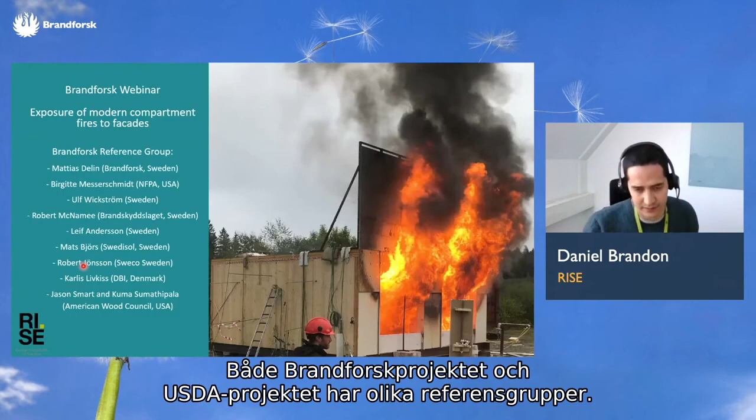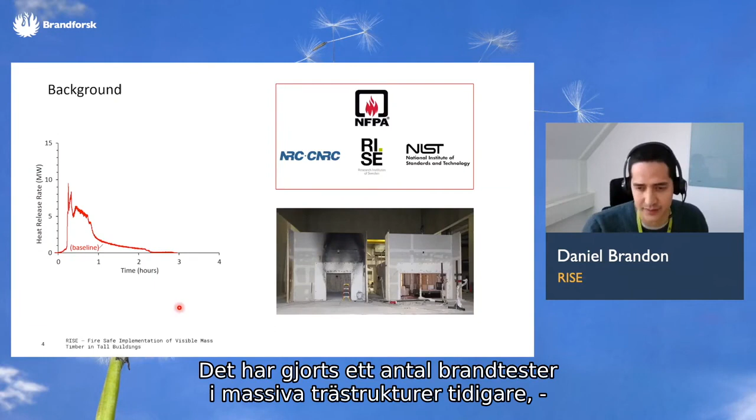A number of compartment fire tests of mass timber structures has been performed before. However, because of recent developments of materials, but also recent new regulations, new tests are needed. In order to explain what these new developments are, I use an older study as reference, which was led by the NFPA, performed by NRC Canada, NIST, and RISE.

This research project had 6 compartment fire tests of 2 configurations shown here. Now I just discussed the ones on the left. You see for this configuration a heat release rate curve of the baseline test, which was a test where all surfaces were protected with gypsum board.

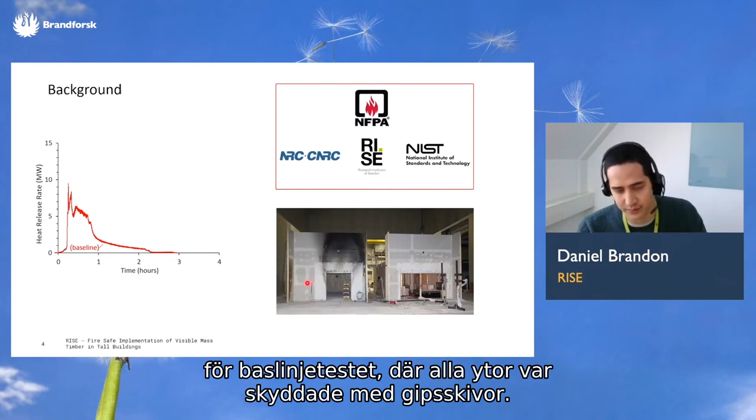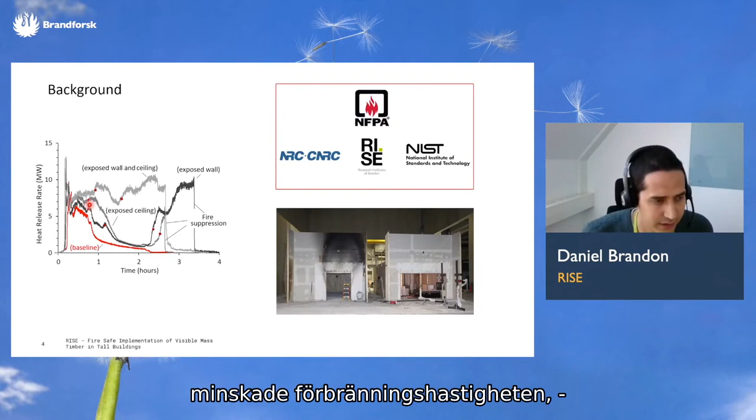I now add the results of the other test where some CLT was exposed, and you see that in contrast with the baseline test where we have a steady decay, there are locations and times in which the heat release rate increased, and we know that the movable content on the floor reduced in combustion rates. That does indicate that the combustion rate of the structure increased at these locations, and it was clear that fire-induced delamination was the cause of this.

During fire-induced delamination, also called glue line integrity failure in Europe, the exposed lamella falls off due to weakening of the bond line, exposing a new colder surface to the fire. If the fire temperatures are hot enough, this surface heats up rapidly, chars rapidly, and combusts rapidly. If we manage to avoid this delamination, we could expect these points to change, and the fire dynamics in the room will change significantly.

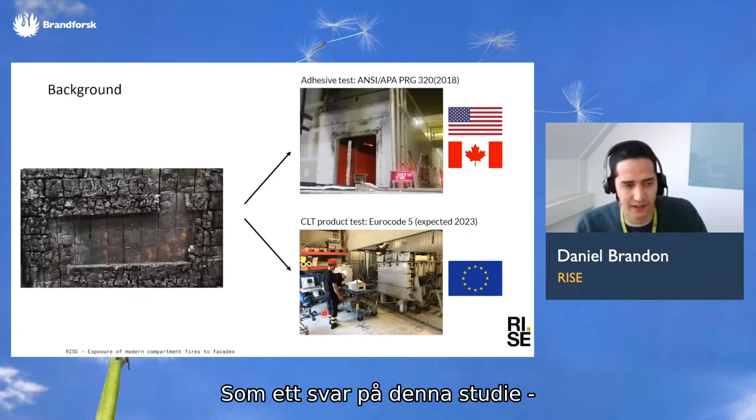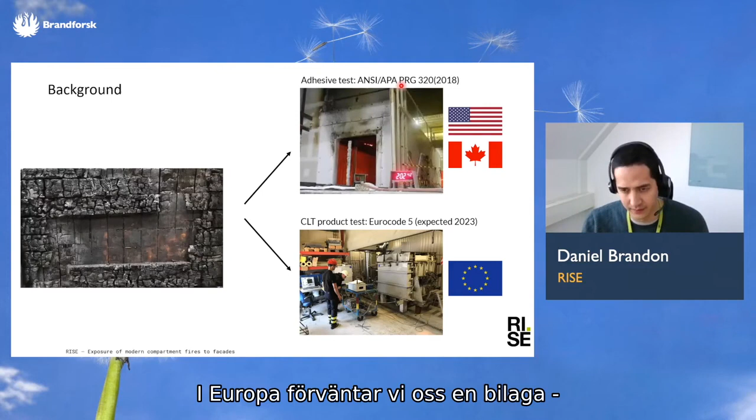As a response to this study, and also some other studies that showed the same effect, there was a new regulation included in the PRG 320, the product standard for CLT in the US and Canada. In Europe, we expect an annex with a standard test method in the next Eurocode 5. Both aim to avoid this delamination and subsequently affect the fire performance of CLT in compartment fires in a positive way.

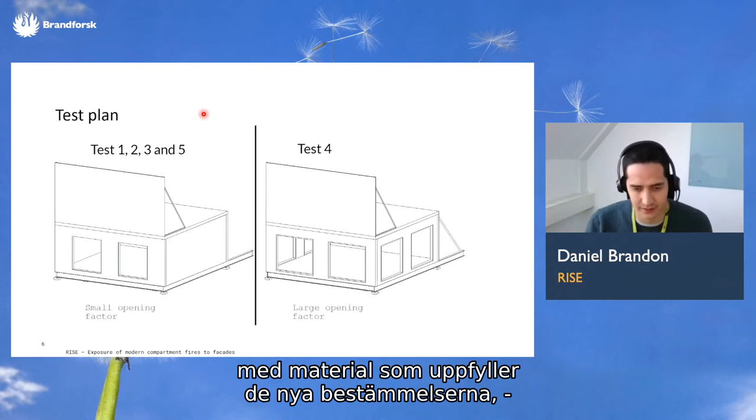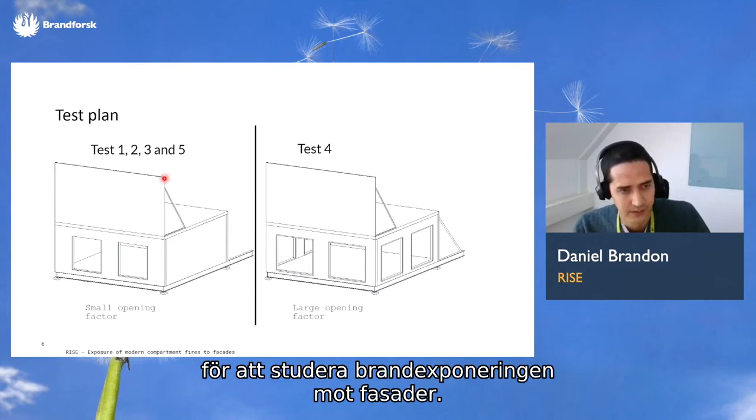So now with the new regulations, we actually need tests conducted with materials that comply with these new regulations, and that's why we did these tests. We performed 5 compartment tests, 4 with a relatively small opening and 1 with larger openings. We added a facade extension on all compartment tests to study the exposure of these fires on facades.

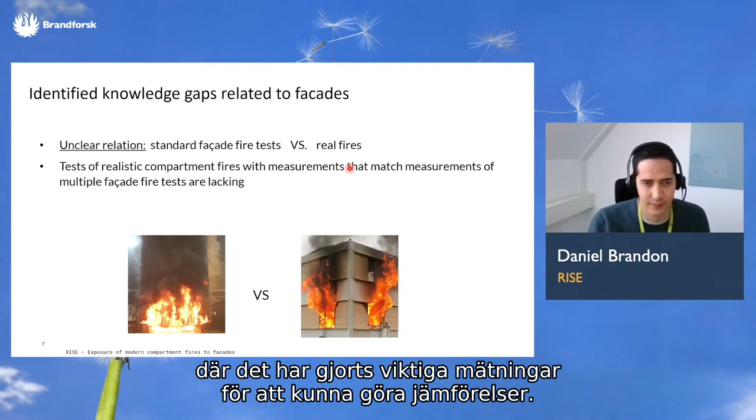One reason to perform this research and study the facade fire exposure is that there is an unclear relationship between standard facade fire tests and real fires. Also, the number of compartment fires with essential measurements for comparisons are lacking. We didn't find a compartment fire test with measurements on the facade that correspond to multiple standard facade fire tests. If we had that data, it would allow us to compare multiple standard facade fire tests, and also to assess whether these tests have a relevant and representative exposure.

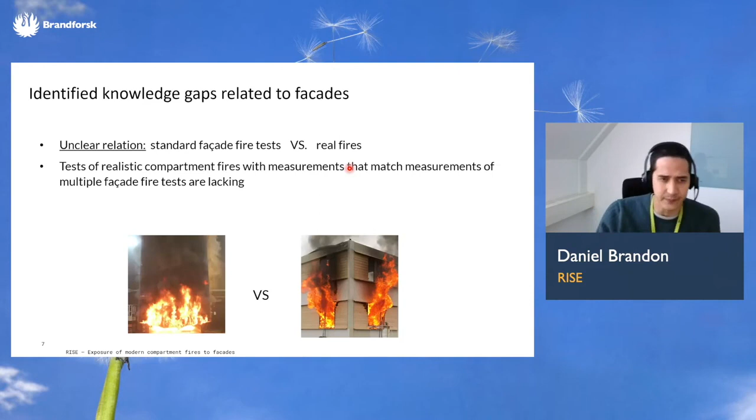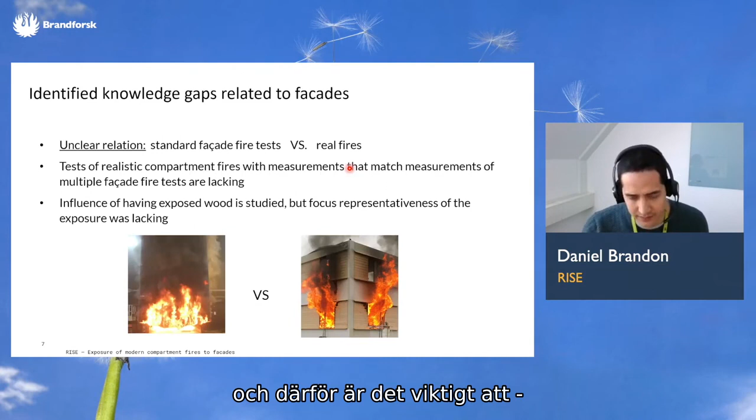There have been studies showing that exposed wood inside a compartment can influence the external fire plume. However, those studies didn't focus on the representativeness of the compartment. We know that the width of the opening has a significant influence on the fire plume - it is correlated, so for slender openings you can expect higher fire plumes. Therefore, it is essential to test representative compartments in order to have a representative exposure.

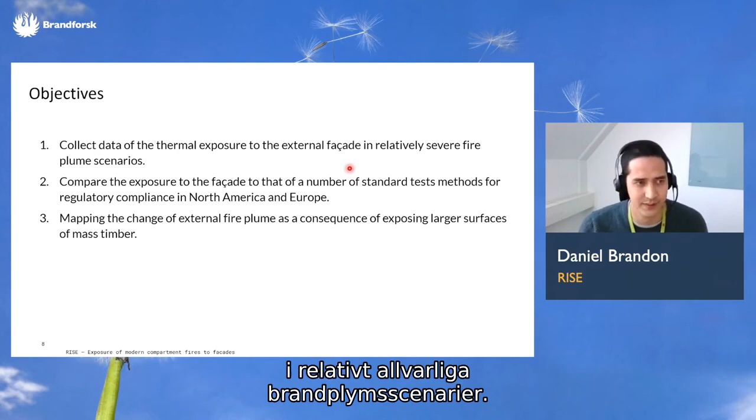In response to the gaps we just showed, we have the following objectives: collect data of the thermal exposure to the external facade in relatively severe fire plume scenarios, compare the exposure to the facade with a number of standard test methods for regulatory compliance in North America and Europe, and map the change of the external fire plume as a consequence of exposing larger surfaces of mass timber.

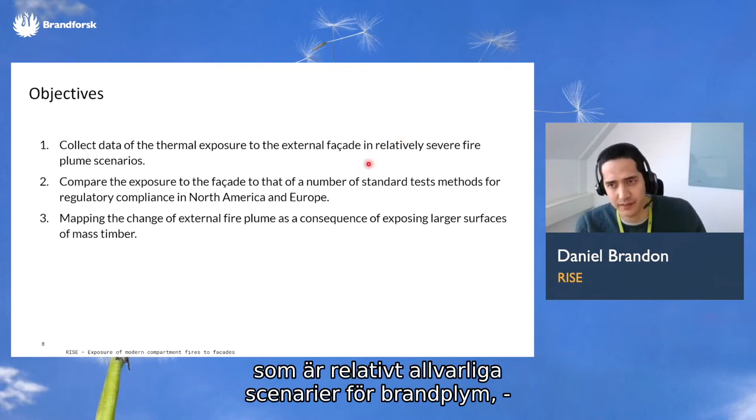In the first objective, I mentioned relatively severe fire plume scenarios, which needs some explanation. To achieve these scenarios, we used statistical data from a recent study in Canada, representing the upper two distribution curves. But we also needed information on opening factors, which we had to determine ourselves. We performed a survey to determine opening factors of about 700 residential and office compartments, resulting in this distribution. With these distributions, we predicted the expected char depth after a fire using a simple parametric fire model.

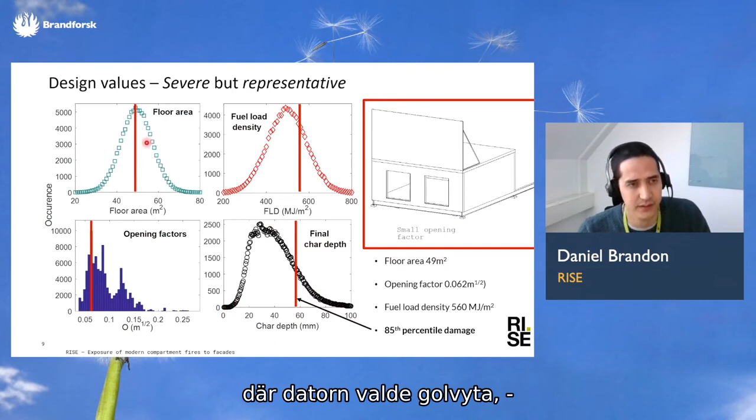This model is simple enough to perform many times. We ran this calculation 100,000 times, where the computer randomly chose a floor area, fuel load density, and opening factor, based on the distributions. After 100,000 calculations, we got this distribution of the final char depth, and made sure our test scenario had a relatively high expected char depth. We ended up with the 85th percentile value of the expected damage, or expected char depth.

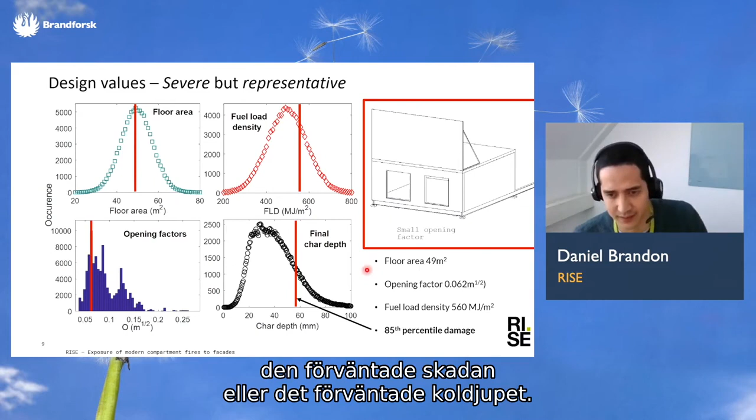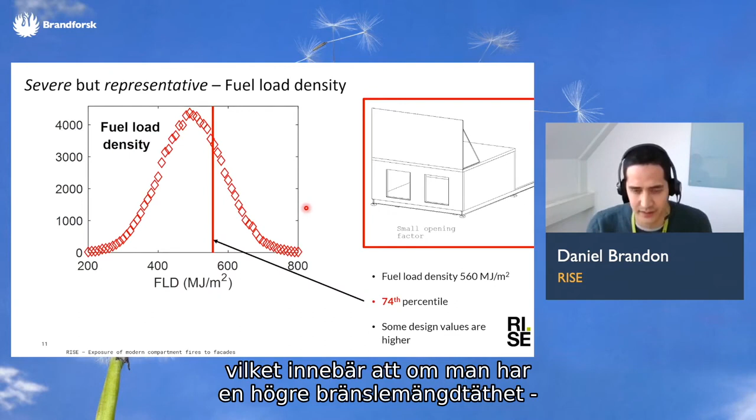The compartment we chose had the mean value of the floor area according to the Canadian study. We ended up with a 74th percentile value of the fuel load density, meaning a higher fuel load density, so we can expect a longer fire. We also had a relatively small opening factor, corresponding to the 25th percentile value of the whole database and the 7th percentile value of mass timber buildings. This indicates that in our database, residential mass timber buildings seem to have higher opening factors. We ended up with a low opening factor because that is the most severe scenario, where we can expect longer fires and higher damage after the fire.

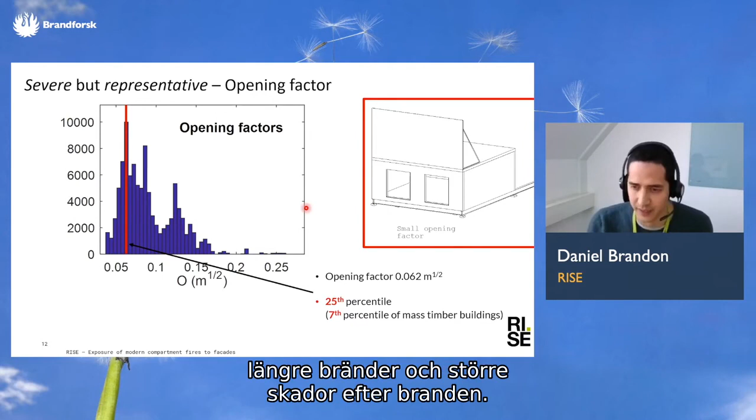So for the small opening factor, we ended up with a small opening factor compartment, shown in this distribution. The large opening factor compartment corresponded more with the office compartments in our survey, shown in purple here.

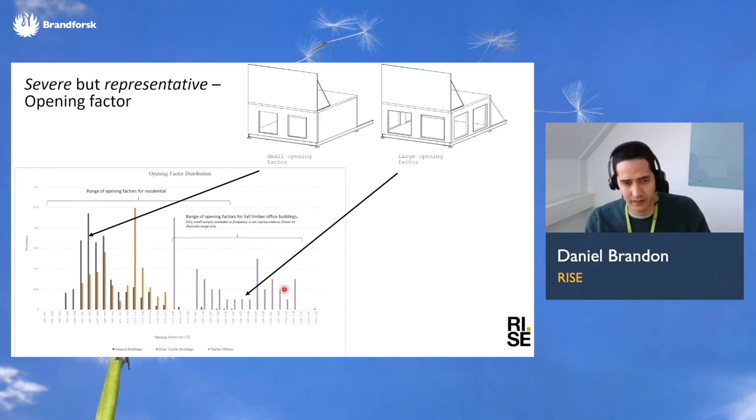The test specimen that we have of test 4 corresponds roughly to the center of the distribution of opening factors that we found.

For facade fire exposure, we know that the width of openings is important. For slender openings, we expect a higher fire plume, so it's important to be on the lower side of the distribution of opening widths we see in real buildings. According to our survey, we were at the 22nd percentile value of opening width, which was the 10th percentile value for timber buildings, since they seem to have larger openings in the survey. This relatively slender opening would result in a relatively high fire plume.

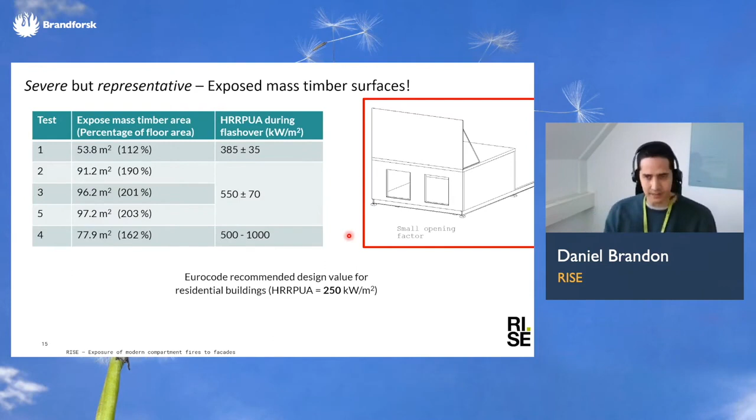Besides having a relatively high fuel load density, a statistically low opening factor, and statistically slender openings, we also had exposed surfaces of mass timber, which contributes to the fire and to a more severe fire scenario. We had tests with surface areas of exposed wood varying from 54 square meters to approximately 100 square meters, corresponding roughly to 110% to 200% of the floor area.

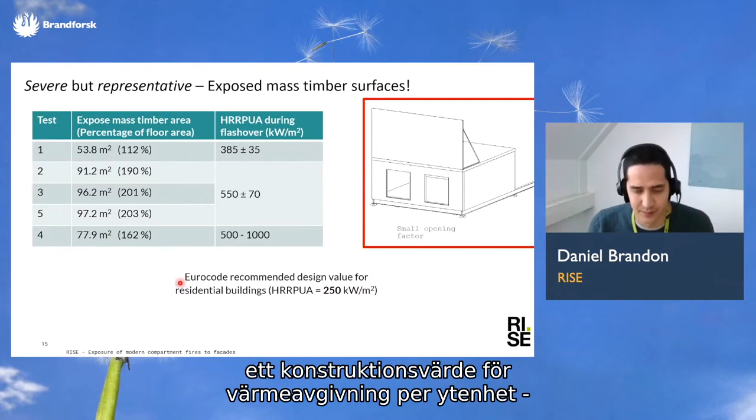The heat release rate of the fire correlates a lot with the fire plume height as well. Here we show the heat release rate per unit area of the different fire tests, and to put that into perspective, we compare it to values from the literature. For example, Eurocode recommends a design value of heat release rate per unit area of 250 kilowatts per square meter, which is quite a bit lower than the values in the table. That does indicate that we're on the severe side with our fire scenarios.

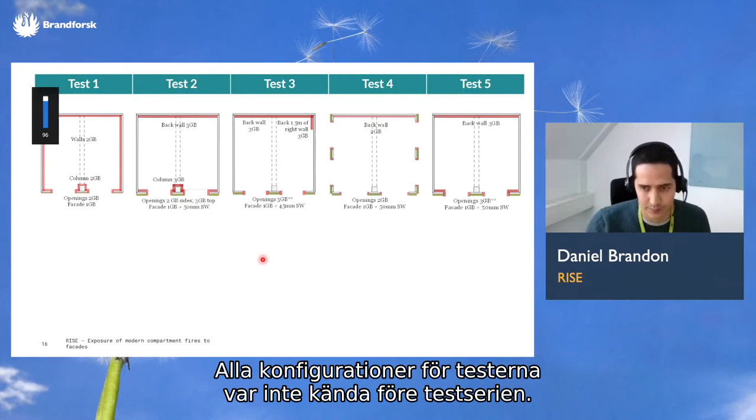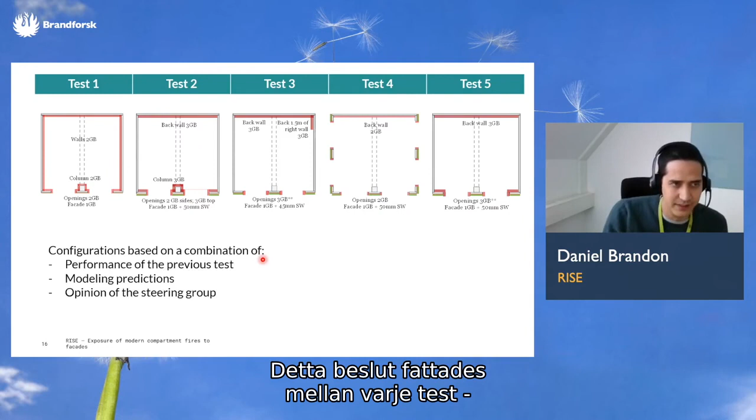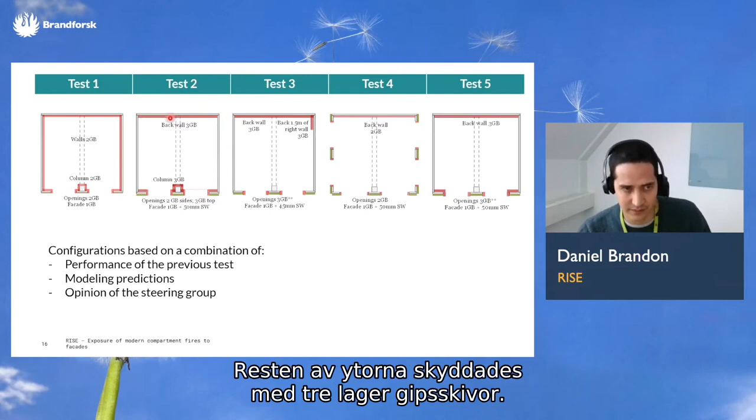The configurations of the tests were not all known prior to the test series, with the exception of test 1. Every other test had some parameters decided in between tests, namely the amount of exposed wood and the amount of protection on the protected surfaces. This decision was made between every test based on the performance of the previous test, modeling predictions, and the opinion of the steering group. We started with the ceiling exposed, then in test 2 we increased the exposed surface areas by exposing the left and right walls. The rest of the surfaces were protected with 3 layers of gypsum board.

In test 3, we only protected the back wall and a portion of the right wall. In test 4, we only protected the back wall, and we only needed 2 gypsum boards in that fire. In test 5, we protected the back wall and 2 strips in the front wall.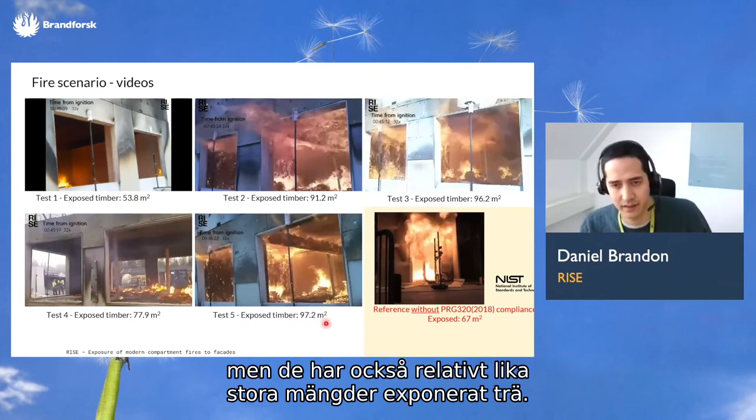Here you see the fire of test 1 starting to decay. Tests 2, 3, and 5 seem very similar, but they also have relatively similar amounts of exposed wood. And here you can see the difference between the reference test and our tests increasing significantly, as this fire doesn't seem to decay.

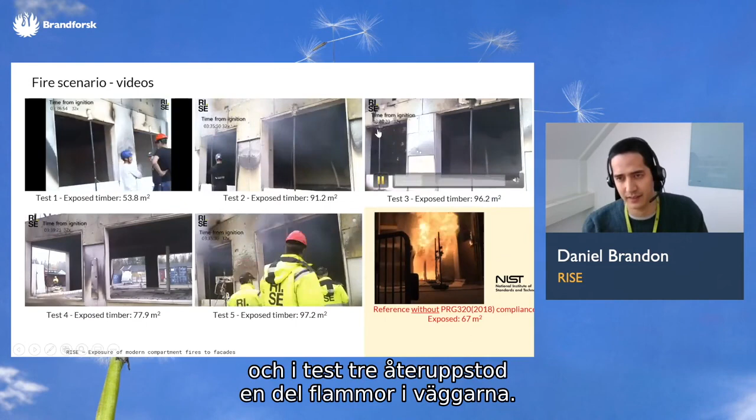At the end of the tests, the fires decayed mostly. In test 1 and test 4, there was very limited smoldering. In test 2 and 5, there was some smoldering in the walls, and in test 3 we had a reignition of some flaming in the walls. In comparison with our reference test, these results show a much more desirable fire scenario.

For the facade fire exposure, it's important to know the heat release rate of the fire. The heat release rate in these tests were determined from the total mass loss, with some corrections for the mass loss of gypsum boards. That is all described in the full report.

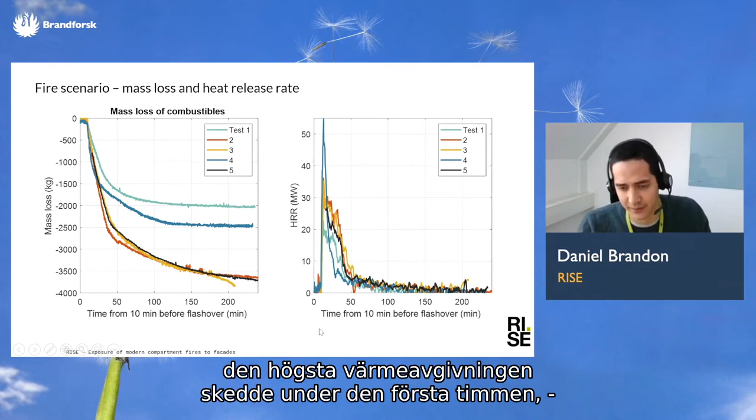Here on the left side, you see the mass of the structure during the test, and on the right side, you see the heat release rate of these fires. You see that the highest heat release rate was seen in the first hour, which is the most important when we look at facade fire exposure.

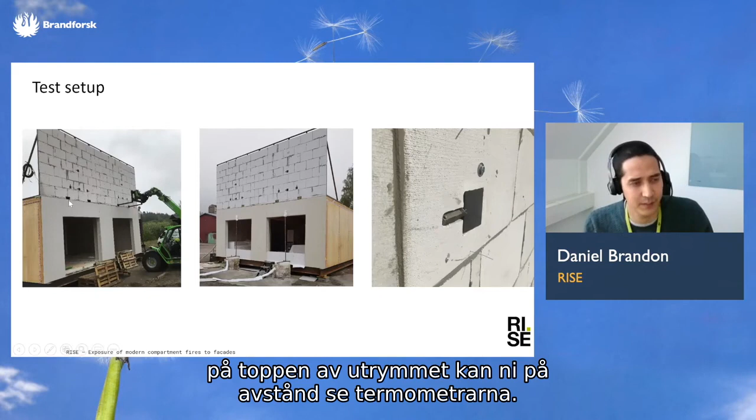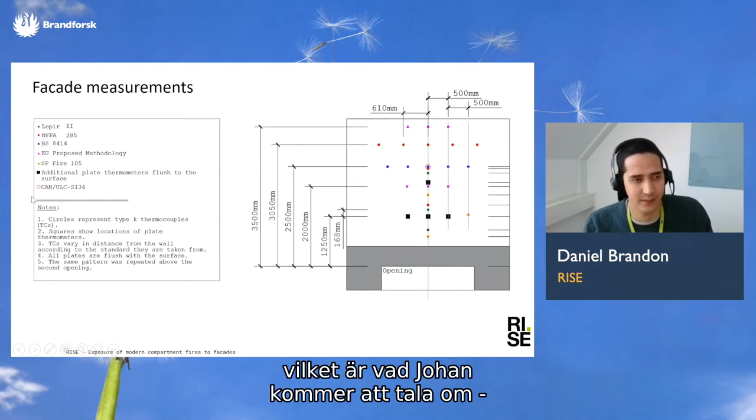These measurements were located in places that match those of standard facade fire tests, which is what Johan will talk about in the next few slides.

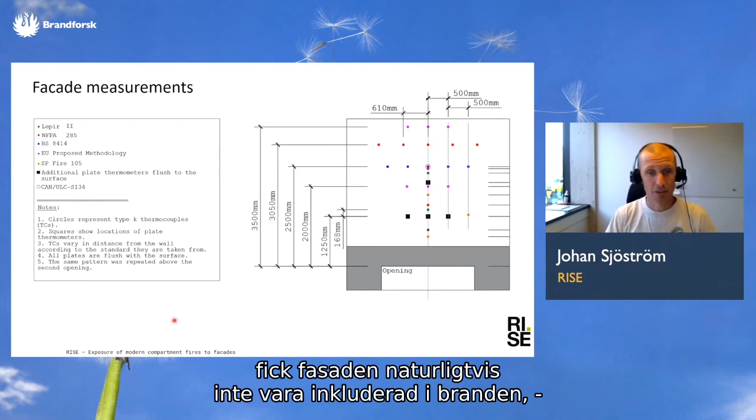Thank you, Daniel, for that. So yes, the positions of the thermocouples and the plate thermometers that we installed were in the exact locations that we could find measurements on from some tests in the literature from other projects. And in order to have a fair comparison, of course, the facade was not to be included in the fire. So therefore, we needed to find tests that were done on inert or incombustible facades.

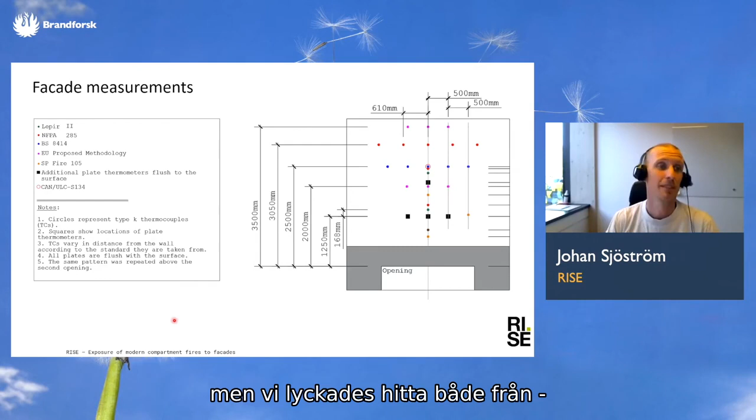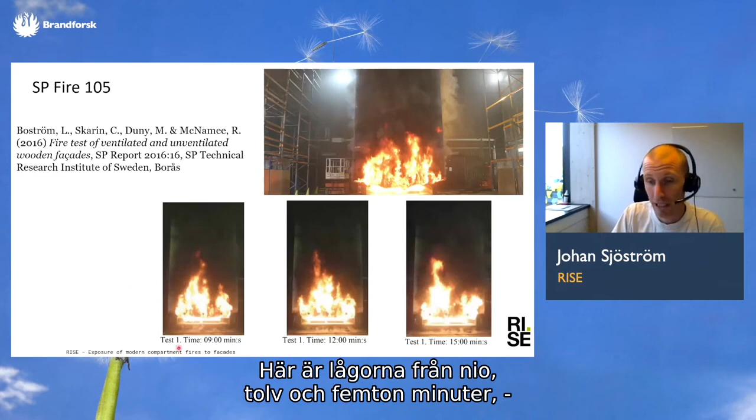And these 3 figures at the bottom are from this reference here, which is actually one of the two references that we use for comparison. So this is an actual test. Behind the flames here, there are plate thermometers that we will compare the results to our test. Here are the flames at 9, 12, and 15 minutes. They seem more or less constant during that period, but shortly after 15 minutes, the test is finished.

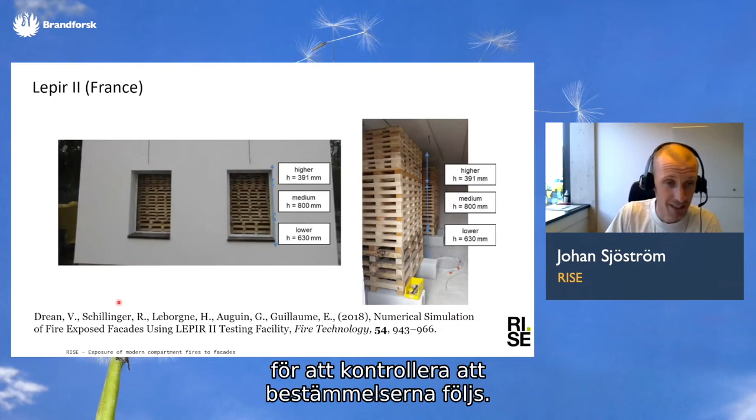We move to France, where the LEPIR II test is used for compliance to the regulations. The test setup is a 2-story concrete building where the bottom floor, 2 meters high, has 2 stacks of wood cribs in it and a ventilation opening in the back.

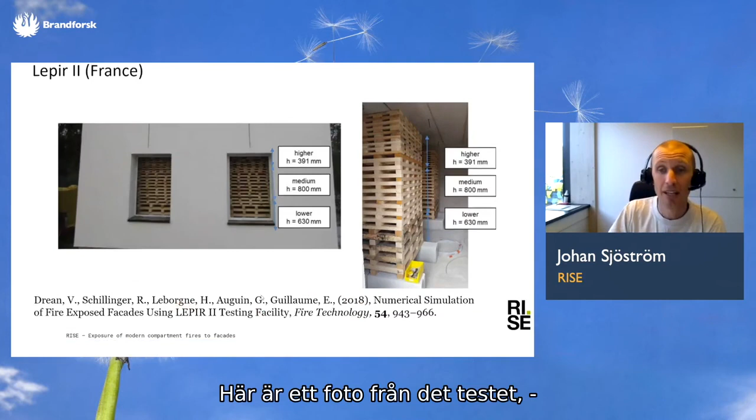We take the data from a publication in 2018 from Effectis. Here is a photo from that actual test. You see a Frenchman overlooking the flames, and here you actually see the plate thermometers installed that we use for our comparison.

There's been a drive for decades to come up with a European harmonized method to assess performance of facades in fire, and there is an ongoing project right now to finalize this method, and it's based on the British method actually. In this project, there's been some tests on the fire source, the wood crib.

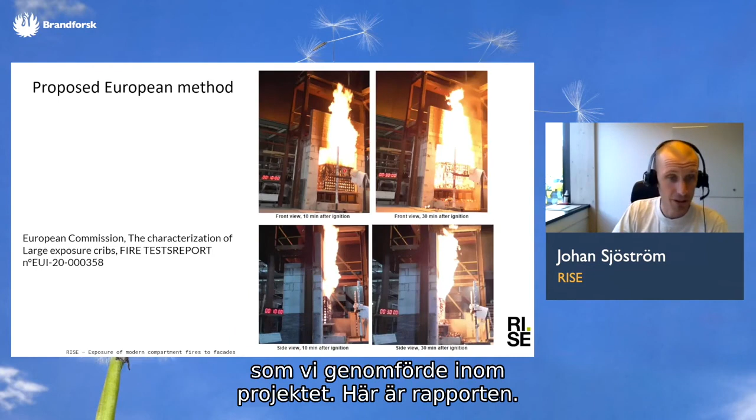So these are some photos from a test series that were conducted within that project. Here is the report. The full facade is not here, but only a few meters above the opening, and behind here there are thermocouples and plates which we will compare to. You see, after 30 minutes there is still a big flame from this quite heavy wood crib.

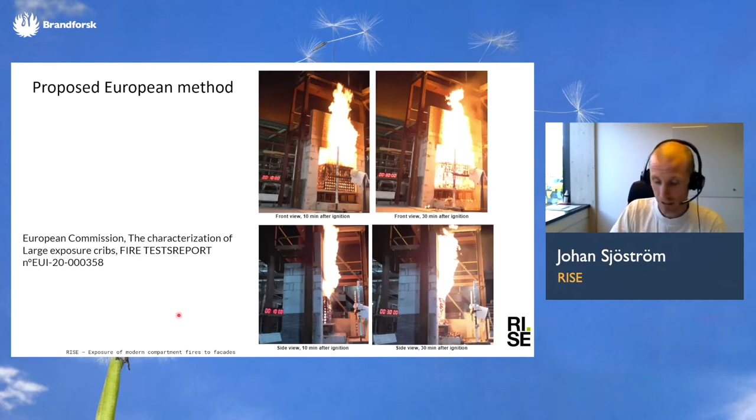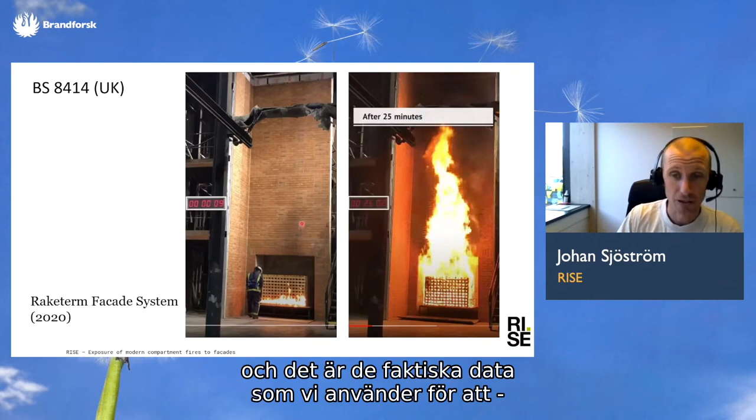And the British method uses a facade at least 6 meters high, and it also has a wood crib which is ignited, and after 25 minutes you see a very tall flame from this test. These two photos are from a test on a brick system, and that's the actual data that we use to compare the flame heights between our compartment test and this test method.

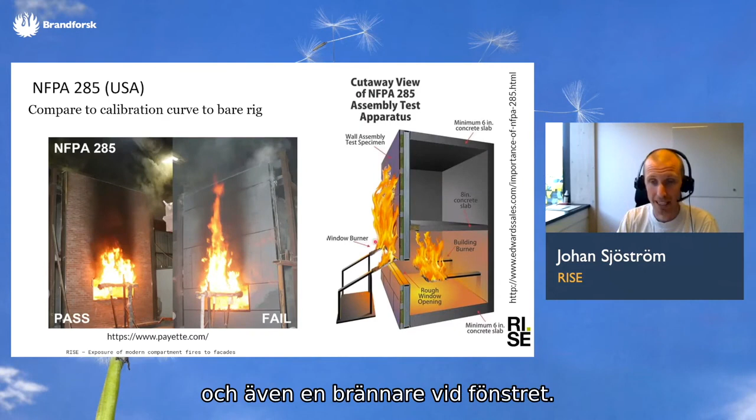Moving then to North America, in the United States, the NFPA 285 test is used for compliance testing. There you have propane gas burners within the burn chamber, and then also a burner at the window. There are two systems being tested, one which passes and one which fails.

And when doing these tests prior to installing the facade, you have to run a calibration test, where you have thermocouples on the bare structure here, the incombustible structure, and those have to follow a certain temperature evolution. We compare our test to those calibration tests which are defined in the standard.

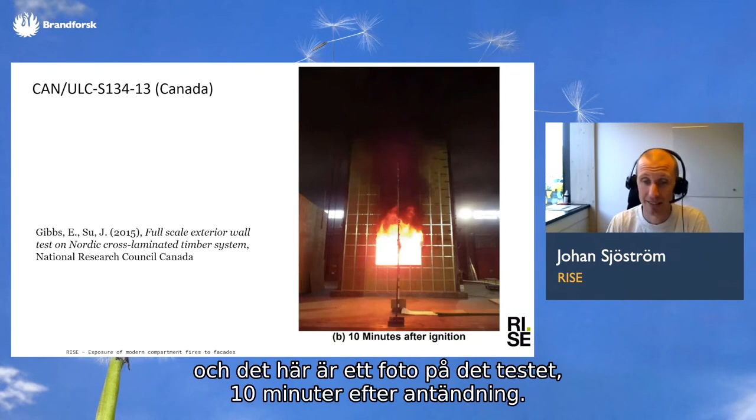Here's a photo just after flashover for all 4 tests for residential buildings, so test 1, 2, 3, and 5. They all seem to have a very similar fire plume ejected from the openings.

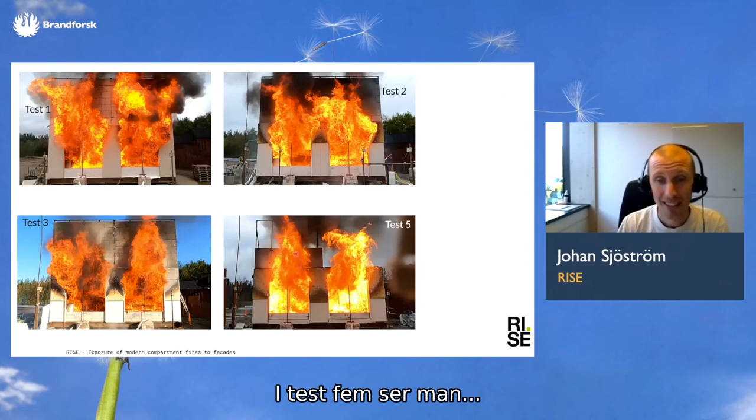In test 5, we had an accident with our mock-up facade just the weekend before the test. There was no time to repair it, so we have measurements on only one side and only to a certain height. But this test is very similar to both test 2 and 3.

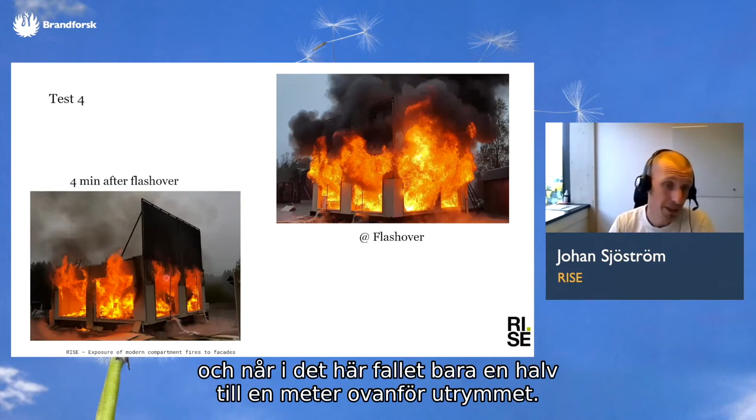Looking at the test which resembled an open plan office space, directly after flashover there was very vivid combustion, with openings on all 3 sides and massive flames coming out. But as you also saw from the heat release rates Daniel showed before, only 4 minutes after flashover the flames are significantly reduced, only stretching between 0.5 and 1 meter above the opening of the compartment.

So on to the actual exposure to the facades. We look now at these 4 plate thermometers that were installed above each opening. Here's graphs

on the fully developed phase for the tests, this is average of both sides. We see test 1 reaches maximum quite high, quite rapidly, and then there's a continuous decay, whereas test 2, 3, and 5, where we have much more mass timber exposed, there's a longer period of constant exposure to the facade. Again, test 4, the office space, does not reach the same temperature in the beginning, and then clearly decreases rapidly after flashover.

There are different ways of expressing thermal exposure. Actually, the term isn't really defined. One way is to use the adiabatic surface temperature, and from these tests we can see in this graph here, the red curve is the plate thermometer, one of the plate thermometers in test 2.

The dotted blue line is the small thermocouple next to the plate. The dashed line is the temperature behind the plate, and from these we calculate the adiabatic surface temperature of the surface, and that's the black line, which we see is more or less overlaid on the plate. So in the future, we only look at plate thermometer temperatures and say that they are basically identical to the adiabatic surface temperature.

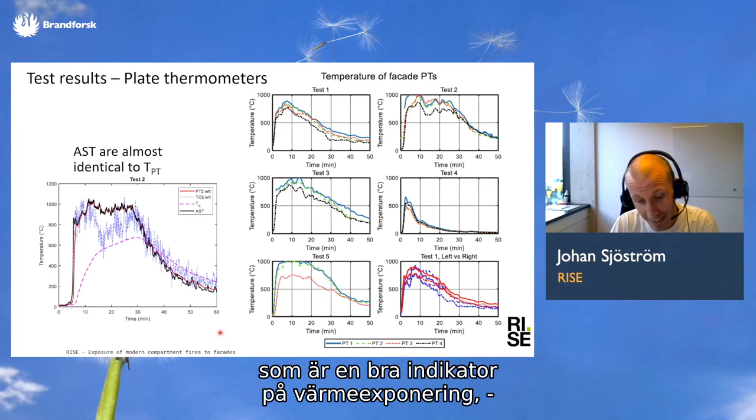In addition to plates, which is a good indicator of thermal exposure, we also had small thermocouples, and the reason was because the test data that we compare with mostly only use small thermocouples.

So in this slide, this is the maximum 5-minute average of all the thermocouples at a specific height. At 2 meters height in test 4, the maximum 5-minute average is 430 degrees. We used 5 minutes for the residential buildings, and only 3 minutes for the short office space. What you see is that temperature decreases with height, more for the office space than for the residential buildings, and that could be fairly described by something which looks linear.

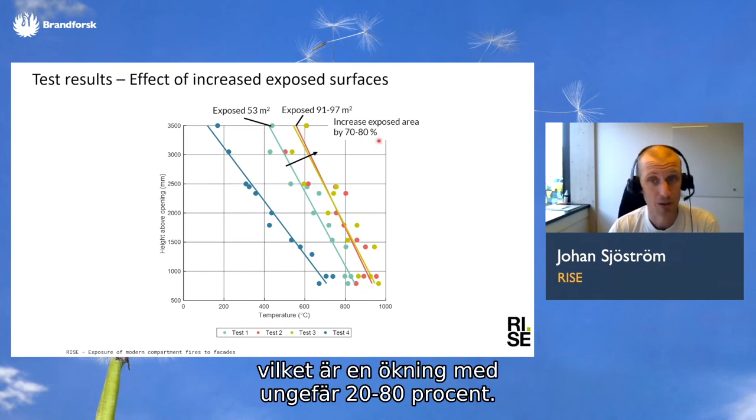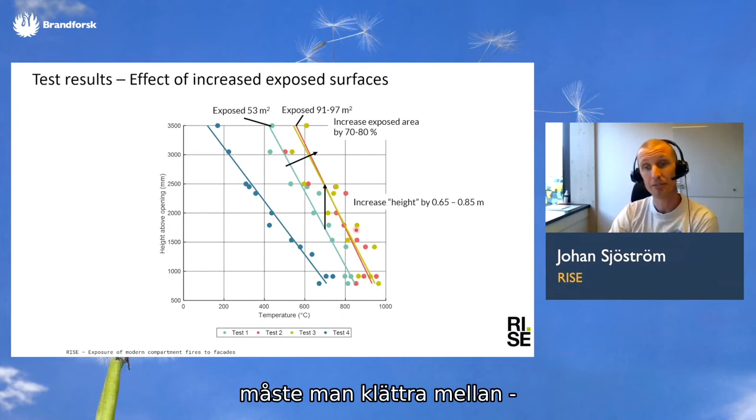We can also look at the effect of increasing the areas of exposed mass timber. In test 1, with the ceiling exposed, we have about 53 square meters of exposed timber. In tests 2 and 3, this is increased to about 91 and 97 square meters, an increase of roughly 70 to 80%. What happens then is we see an increase in temperature on the facade between 100 and 130 degrees. Alternatively, to reach the same temperatures in test 1 that you have in tests 2 and 3, you'd have to climb between 0.65 and 0.85 meters up along the facade.

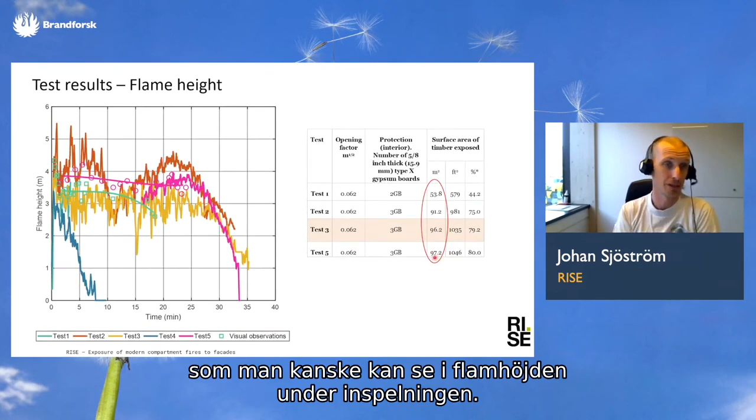This height difference is something you might be able to see in the flame height of the recording. We had an automatic image analysis routine where we evaluated the flame heights of the tests, and we see that in our tests they vary between 3 and just over 4 meters. Test 2 had the highest flame height, and test 3 had the lowest, and test 3 was the only test where we actually had a slight influence of wind, which you could see reduced the height of the flame.

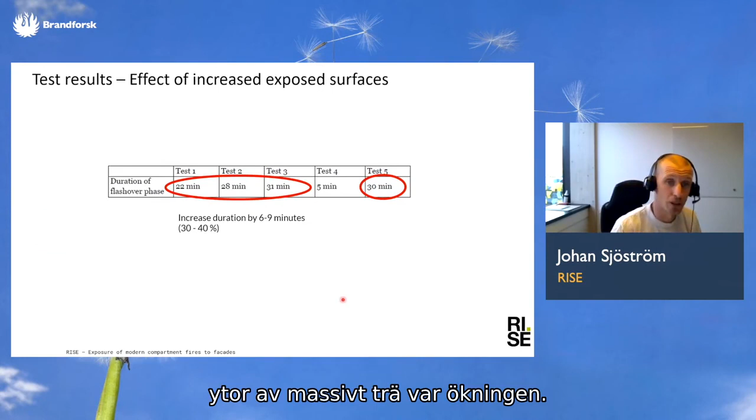But the most significant effect of exposing more mass timber surfaces was the increase in duration. In test 1, with the ceiling exposed, we had a 22-minute fully developed phase, whereas in tests 2, 3, and 5, there are about 30 minutes. That's an increase of about 30 to 40%.

And the office building, of course, is very, very short still.

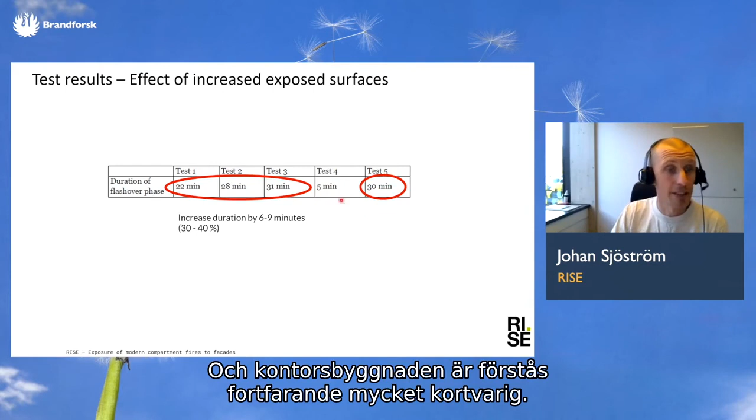Okay, on to the actual comparison between our compartment tests, which are severe and representative of mass timber buildings, and the compliance tests used around the world.

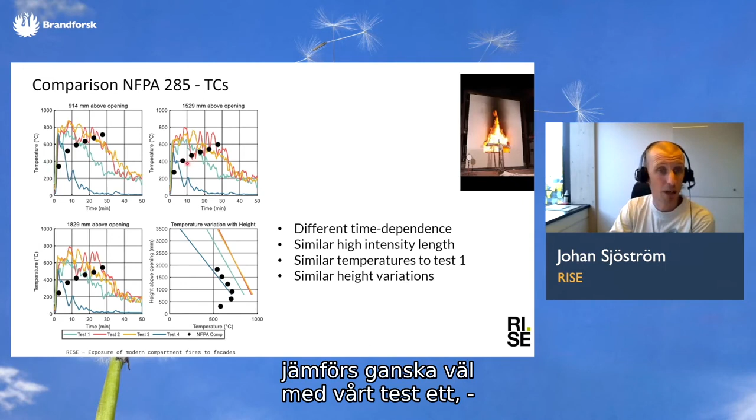We start with the NFPA test in the United States. We see that the calibration curve there is meant to simulate somewhat of a time-temperature curve from a fire resistance test, so it increases throughout the test. It has a similar length of fully developed fire as our test, and the average temperature during the test compares pretty well to our test one, the one with only the ceiling exposed. We also see that the variation of temperature with height corresponds well to our compartment tests.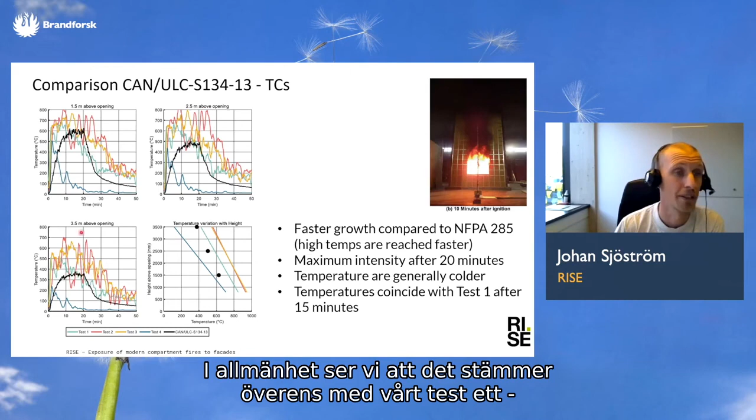Moving to Canada, we notice that the growth in the Canadian test is faster than the NFPA test, so it reaches high temperatures more rapidly. However, it reaches its maximum after only 20 minutes, followed by a decay. And generally, at least further up on the facade - this is 1.5 meters, 2.5 meters, and 3.5 meters above the opening - the further you go, the colder the temperature of the Canadian test is compared to our compartment test. Generally, we see that it agrees with our test one after about 15 minutes after ignition.

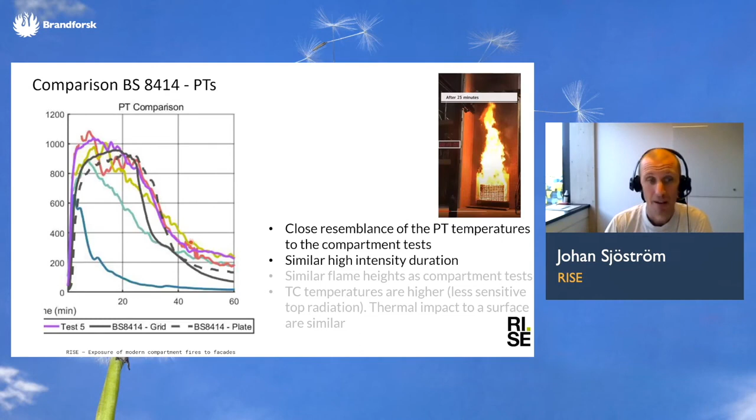In Europe, the BS 8414 test used in the UK showed a close resemblance of the PT temperatures, the plate temperatures of the test and the compartments. So we see that it has more or less the same duration and more or less the same exposure. On the other hand, we see that the thermocouple temperatures, the small thermocouples also installed on the facade, show high temperatures in the test compared to the compartment test.

The reason for that is that in the compartment test, we have a very big flame, which is ejected maybe a little further from the facade, so the thermocouple maybe not at every instant picks up the warmest gases. However, we have a lot higher radiation from the compartment test. So in the end, the plates, which are a good representative of exposure, are very similar, even though you see a difference in the thermocouple temperatures, the small ones.

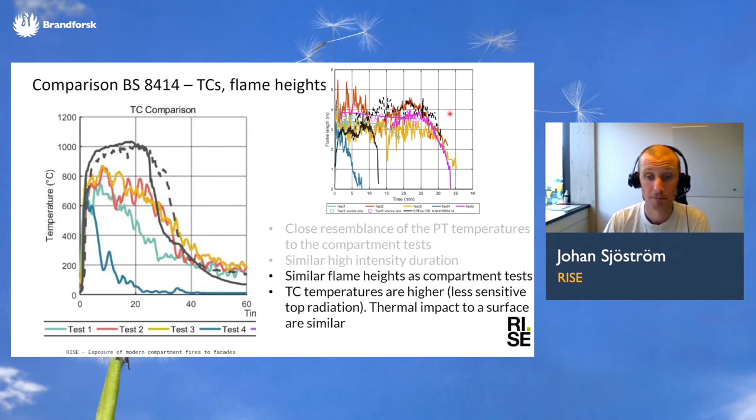The flame height for the British test is alongside the highest of our compartment tests. And the proposed European method is very, very similar to the BS 8414 test, and therefore we see that if we take the average of the gray ones here, which are the test method, and our compartment test, they actually fall within plus minus 100 degrees of each other.

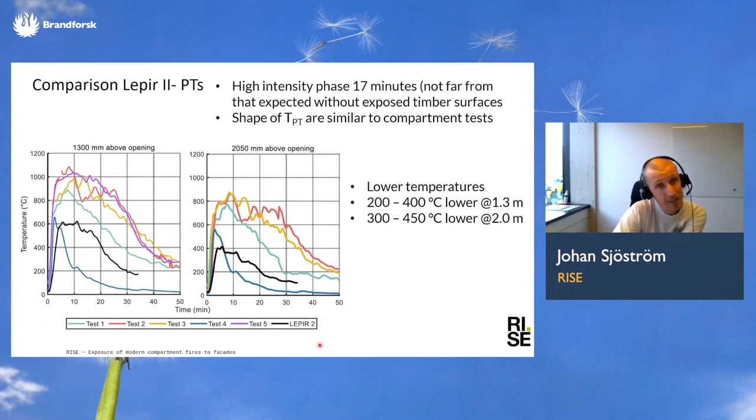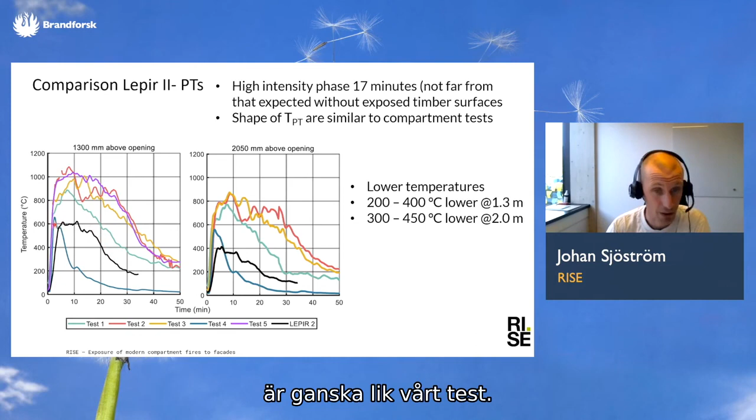If we look at the LEPIR II test in France, we notice that the high intensity phase of the test is about 17 minutes. That's actually not far from what we expect from our compartment test if we would have no visible surfaces of mass timber. We also see that the shape of the temperature evolution is quite similar to our compartment test. However, the temperatures here at 1.3 meters and here at just over 2 meters are significantly lower than what we found from our compartment tests - several hundred degrees lower, actually.

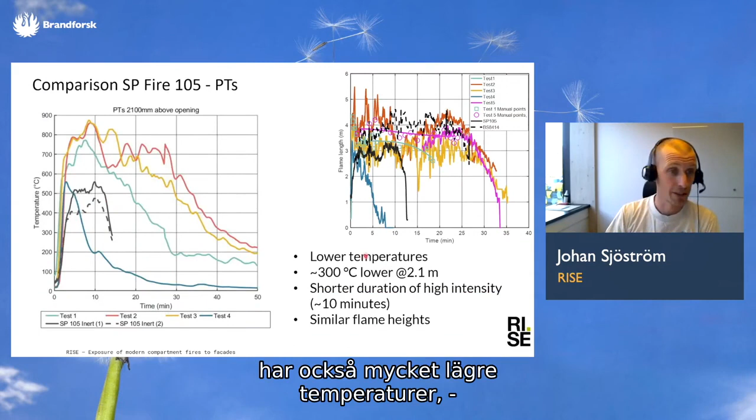The Swedish SP Fire 105 test has also much lower temperatures, maybe a bit higher than the French one. However, we notice that the duration of the fully developed phase is only 10 minutes, so very far from what we see from our tests. The flame height, however, is around 3 meters, which is in the lower part of ours, so the difference there is not so striking.

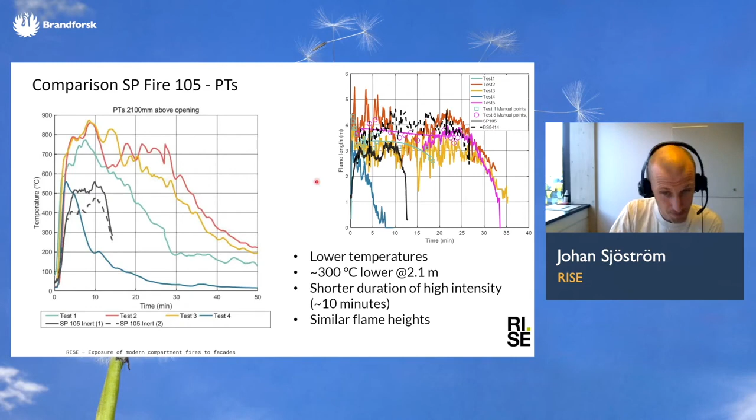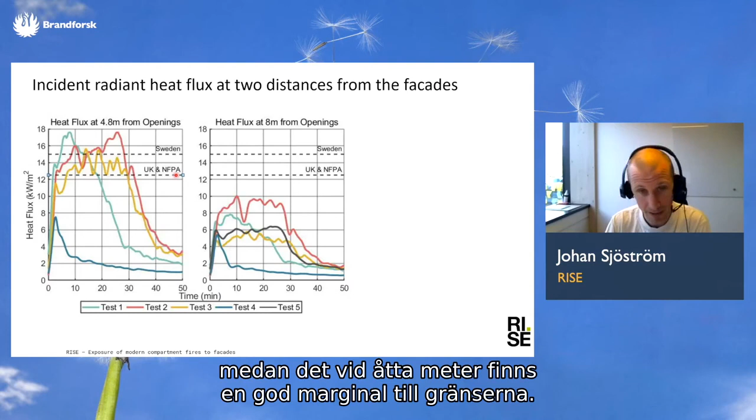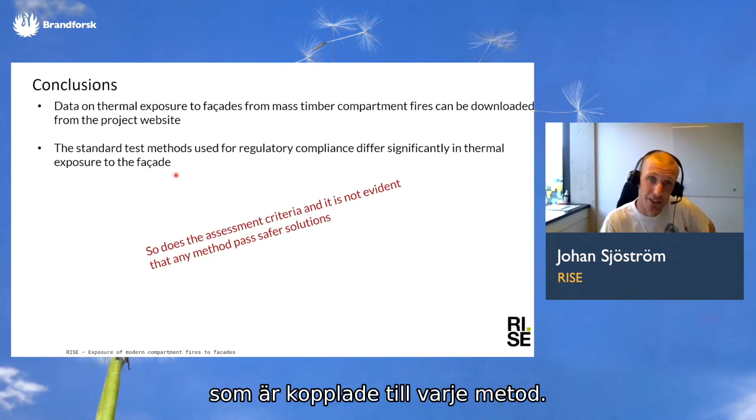So trying to conclude this, we now have data on the thermal exposures to facades from representative and severe mass timber compartment fires, and this can be downloaded from our project website. We notice that the standard test methods used for regulatory compliance differ significantly in thermal exposure to the facade between them, both within Europe and between North America and Europe. However, so does the assessment criteria associated with each method. So there is no evidence that any method will pass safer solutions to the market than any other.

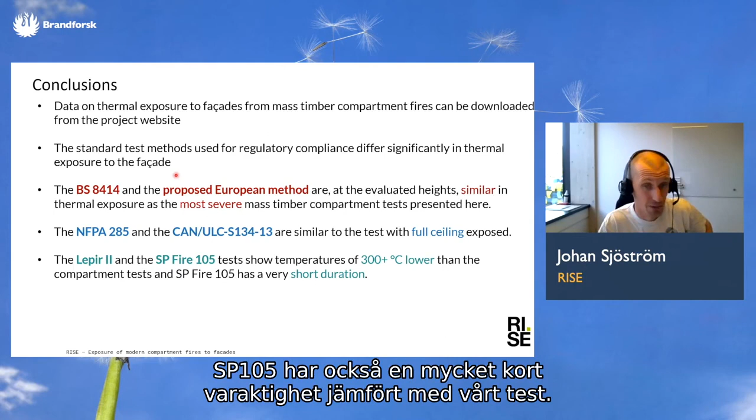We can conclude that the BS 8414 method and the proposed European method are, at the evaluated heights from this study, very similar in thermal exposure to the most severe mass timber compartment test we performed. The NFPA and the Canadian test are similar to the test we performed with a full ceiling exposed, so test 1. The Lepir 2 test and the SP Fire 105 show clearly lower temperatures on the facade than our compartment test.

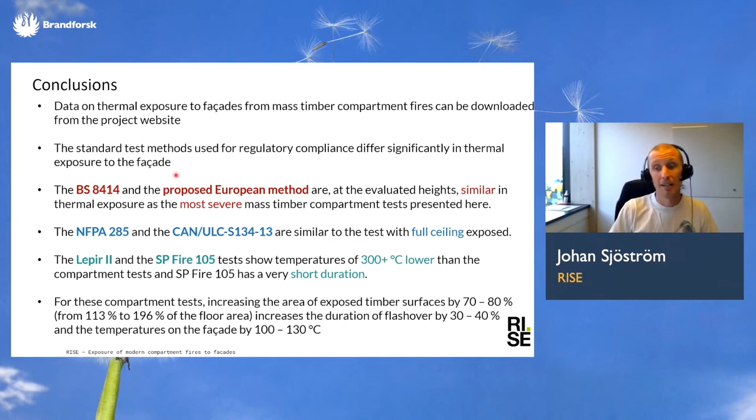SP 105 also has a very short duration compared to the compartment tests. Finally, for these tests, if we increase the area of exposed timber by about 70 to 80%, going from just over the floor area of the compartment to roughly twice the floor area, we increase the duration of the fully developed phase by 30 to 40%, and the temperatures on the facade by 100 to 130 degrees, as measured by small thermocouples.

If we can share my screen, I've got an image which shows some shots, a brief overview of how we did it. One of the other guys involved in the project actually did this work for us, so we should probably credit Emma with the hard work that went into it. But in essence, we took the frames from the videos and converted them into a grayscale image, and then from there into black and white.

And that allows us to define the flaming regions. And then at each step, we took whatever the highest, the tallest consistent flame was that was emanating. So for the example we've got here, you can see there's two small bits which are broken off at the top, so we ignored them. With the red box, we have the area that would be chosen for this particular frame.

And then we know the height related to each pixel, or close enough. It'll be slightly distorted from the angle, but it's reasonably good. And that gives us the height of the flame up to a limit, so there are a small number of flames on a couple of tests where it just exceeds the limit, but it's not very often that it hits the top. And it's 120 frames per second, so it's a lot of frames. Okay, thank you.